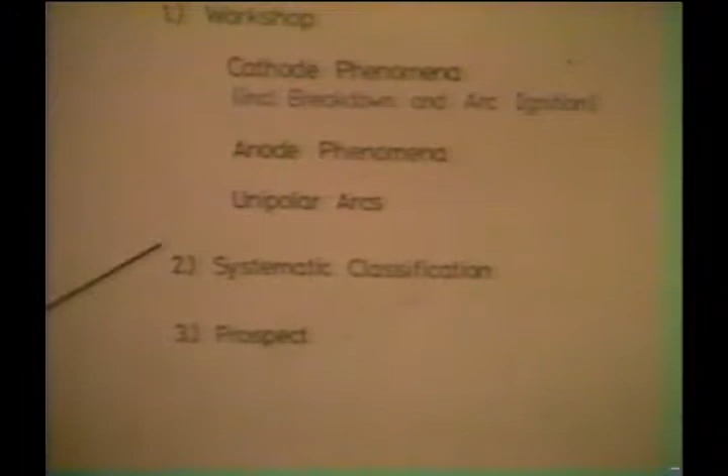I will subdivide my talk into three sections. First, I will consider the workshop and give some statements about what has been discussed—cathode phenomena, including breakdown and arc ignition, and anode phenomena, including unipolar arcs. Then I will make some more personal statements on what I think could be a classification at the cathode. And finally, if time permits, I will look into the future and discuss what I feel would be an interesting topic for future investigations.

So, let us start with the workshop.

The idea of the workshop occurred on a flight from Boston to Europe, to Dr. Delcroix and myself. We felt that people working on electrode phenomena, whether in gases or in vacuum, deserved some kind of meeting where they could exchange views. We felt that people in industry and those in scientific institutions or universities had insufficient contact, and particularly those working on fusion seemed to take little notice of what was going on in other areas, so work was being duplicated. We thought we should have some kind of conference first.

The first conference was in 1972 in Paris, then one in '74 in Bucharest, in '76 in Estoril, Portugal, and in '78 in Bad Honnef, Germany. In 1980 it was supposed to be in Moscow, but due to some unfortunate developments that didn't work out, so the fifth one, in '82, was in Berlin, as I said.

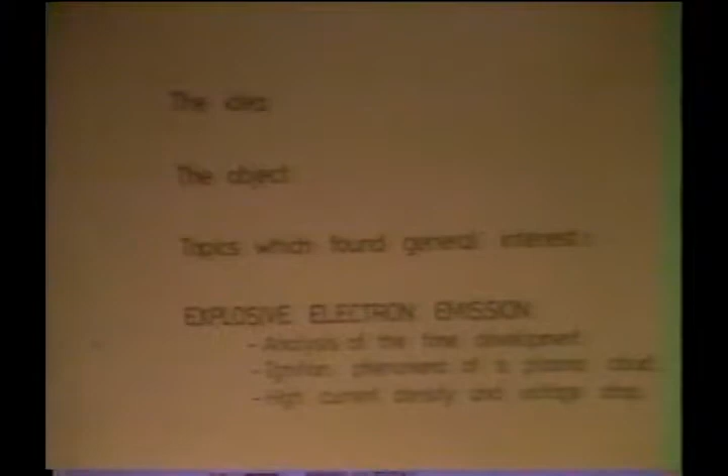This is a very old building, some kind of a castle there in Honnef, and you can't leave, you have no distractions, and you are sitting together all day, so you can't escape each other, and there were lots of discussions there. In Berlin, we also tried that. We had review lectures in the morning and short contributions in the afternoon, but shorter contributions than here, and more discussion, although some of the people, particularly some of the Russian friends, felt there should have been even more discussion.

We had chosen Berlin intentionally because we felt it would get more of our friends from the East to the conference, and we were very successful with that. Most of the well-known scientists from Russia were present, like, for instance, Mesyats, Lyubimov, Rakhovsky, Proskurovsky, Petrov, Sukova. I can't name them all here. This was very well attended from this side.

So we had 4 days of morning review lectures, so I'm going to review here the review lectures, which already shows that it will not be easy.

The object which I'm going to consider is shown on the next slide, please. That's not the object.

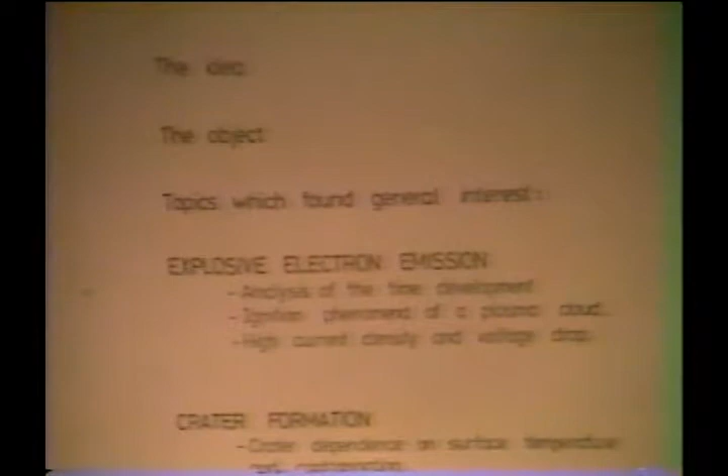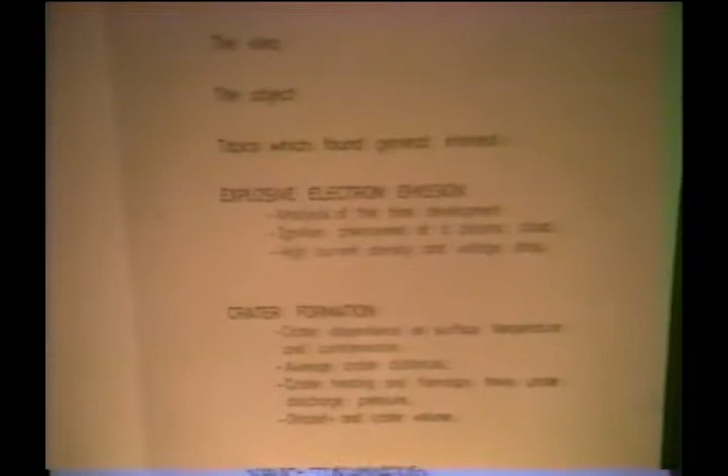I was careful, I went upstairs and got some others. If this doesn't work, I'm going to take something else here. Yeah, that's what I thought. Well, that causes a little bit of a difficulty. They don't work? I thought they were normal size, but they're probably not too tall, they're too fat, probably, if it is European size. Well, since I was afraid that would happen, I ran out a moment ago. Oh, there it is. Oh, very good. Very good, very good. Thank you very much.

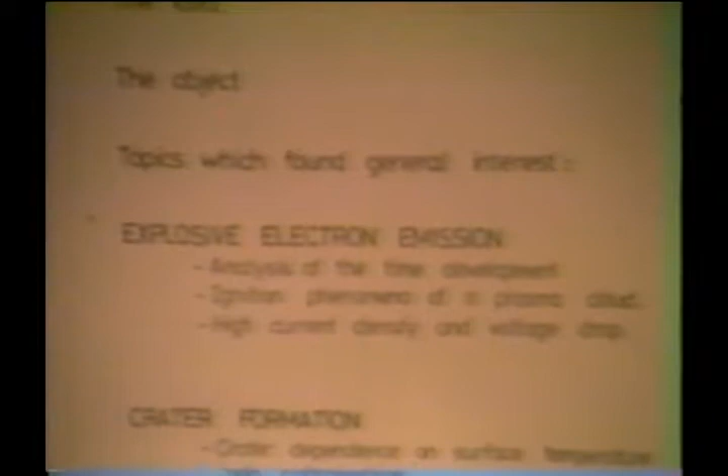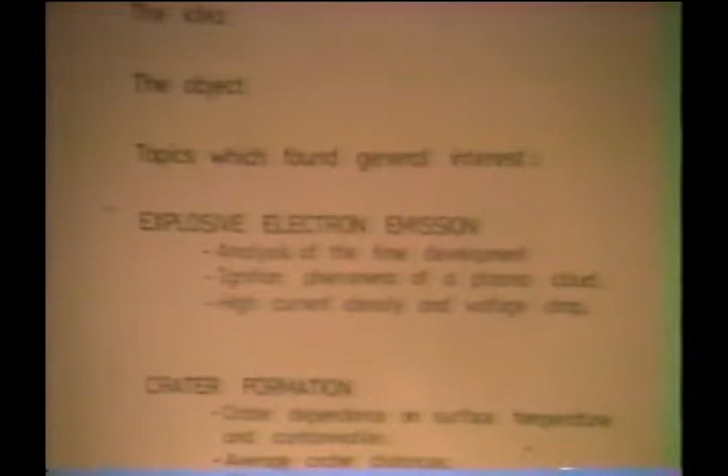Since you had this morning the lecture by the outstanding expert in the field, Dr. Mesyats, I don't have to go very much into the details. I remember that Mesyats presented an analysis of these phenomena on the basis of 3 laws: one giving the relation between the current density and the relaxation time for the flare, one giving the space charge limited current, and one the constant velocity for the expansion of the flare. With that he could explain some of the data of this really extreme phenomena. As you remember, we have nanosecond time developments, fields of 10 to the 7 volts per centimeter, densities of 10 to the 20 per centimeter cubed, and so on. So that is really a situation difficult to describe.

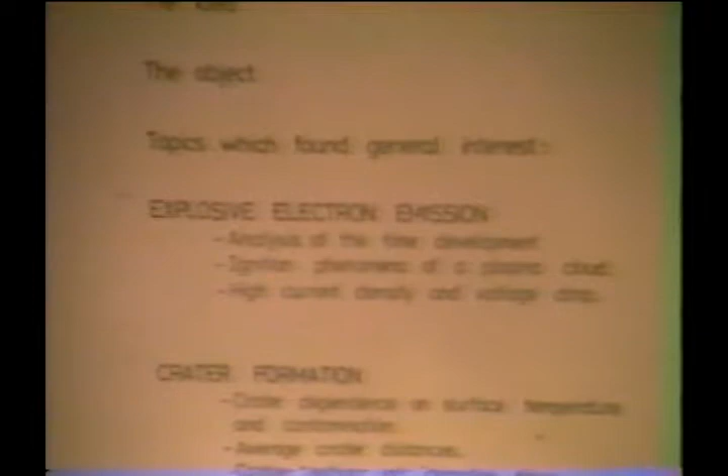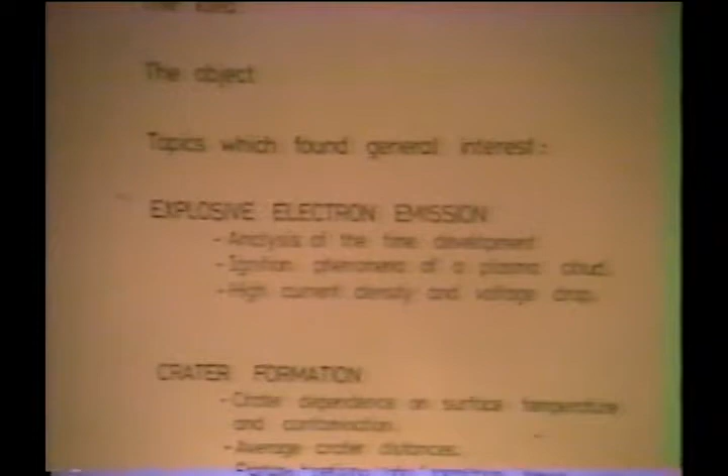Dr. Mesyats also talked about the motion of the cloud over the surface. You heard this morning, so I'm embarrassed to give a not so excellent presentation here. The motion of the cloud over the surface — one of the essential points I would like to stress is that he really could show that reignitions occur, and that they occur not uniformly over the surface. There are reignitions in the environment of the original spot, then there's an area where you have no craters, and then outside you have craters formed again. By the way, a phenomenon which also has been considered by Lyubimov and Rakhovsky. I will come back to this.

Apart from Dr. Mesyats, Dr. Fursey gave interesting information about the reformation of protrusions on the surface, and the current dependencies of subsequent pulses. It is impossible to give you details here about all these findings. There was one feature which particularly impressed me with respect to the last slide which you saw.

You all know that if you talk to a theoretician, you say, well, what kind of crazy surface are you using? Such a flat, straight, plane surface is nothing which happens in reality. And theoreticians like to say, yeah, but remember, it is molten, the surface. And a molten surface, of course, is smooth with no tips.

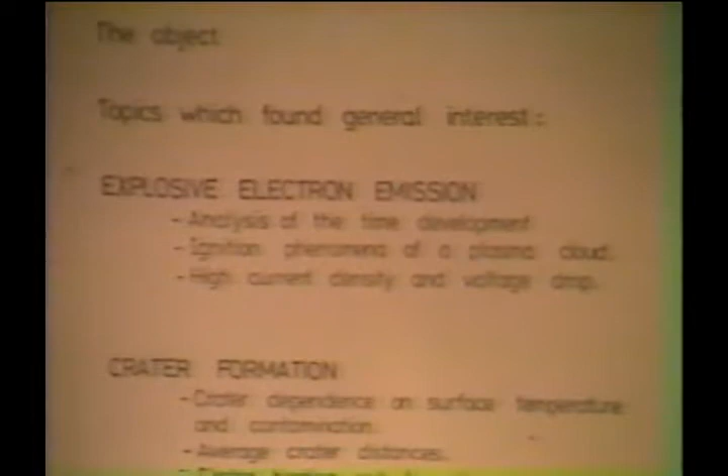So there was a lot of discussion about these things here, and the topic was very interesting. So I think I have to go a little bit faster. Another topic which had been discussed was crater formation. There was a paper by Jüttner who provided a large amount of information about craters. I will try to summarize that very briefly.

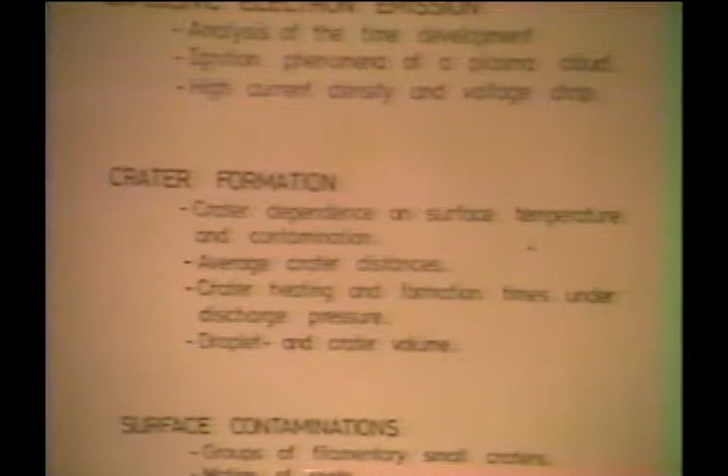And that the time development for the craters is very short. That was one of his important statements, about 10 to the minus 8 seconds. And that the crater formation depends on the temperature of the surface.

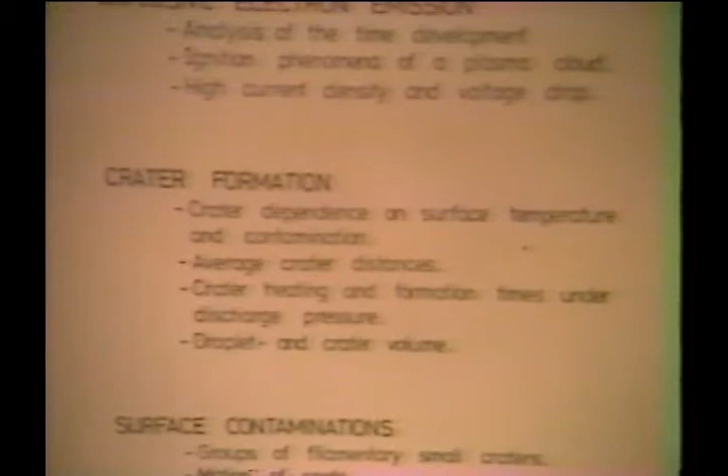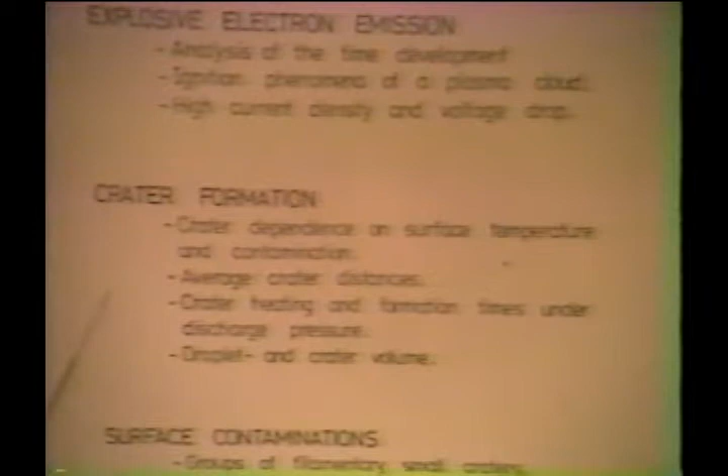One of the important conclusions was that Dr. Juttner said he felt that ion bombardment heating must be the decisive process in the formation of the crater because it is so fast.

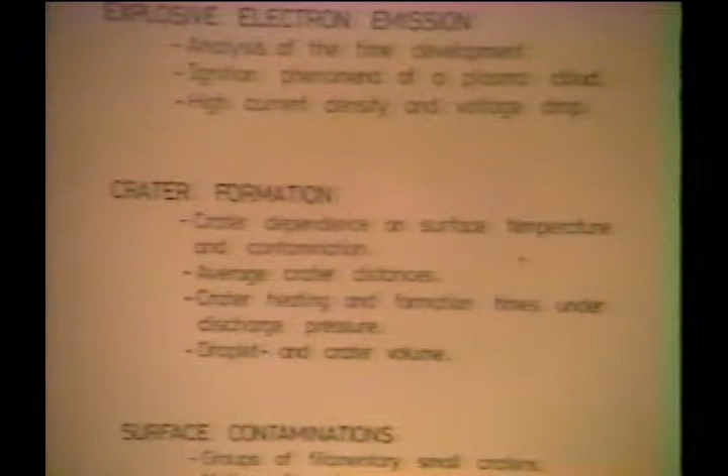There was another contribution by Dr. Daalder, who is also very much interested in craters. He showed from the observation of the random walk of the spots that they observe a Rayleigh law after some time, and from this Rayleigh law he could calculate the average step length and the development time. He came up with a step length of 3 crater diameters and development times of 10 to the minus 6 to 10 to the minus 10 seconds.

These contributions also were discussed quite a bit, and one of the points in the discussion was the question whether joule heating or ion bombardment heating is dominating.

One of the outstanding points was that Daalder said he had observed droplets from craters, the volume of the droplet being much larger than the crater. And yeah, that was a reaction of most of the people there.

Some people said, is mass conservation not true anymore? But we finally settled that this might be possible, because if you start to form the droplet from a mountain, from a protrusion, then of course the mountain is also material that may be larger than the crater itself, the crater volume.

I have to hurry. Surface contaminations — how much time do I have, Professor? Surface contaminations, there were contributions of Dr. Juttner. Halfway through, fine.

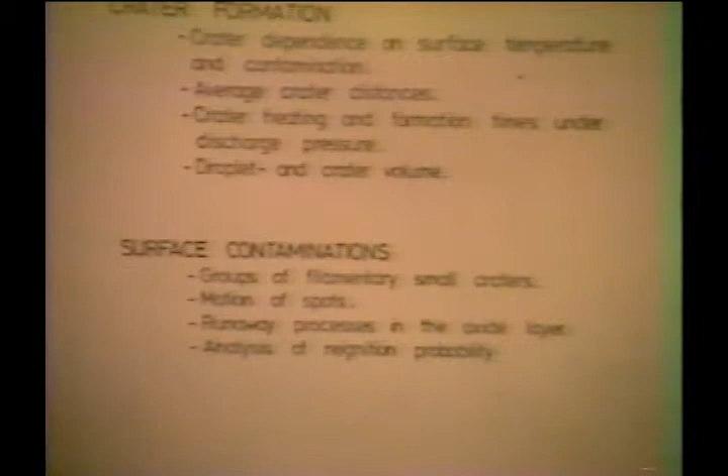There were many more contributions, but some of the most important ones, again by Juttner, by Dr. Geil, by Lyubimov, and Rakhovsky. The last one was a theoretical one. Juttner, as I already stated, found that he has a completely different structure on contaminations.

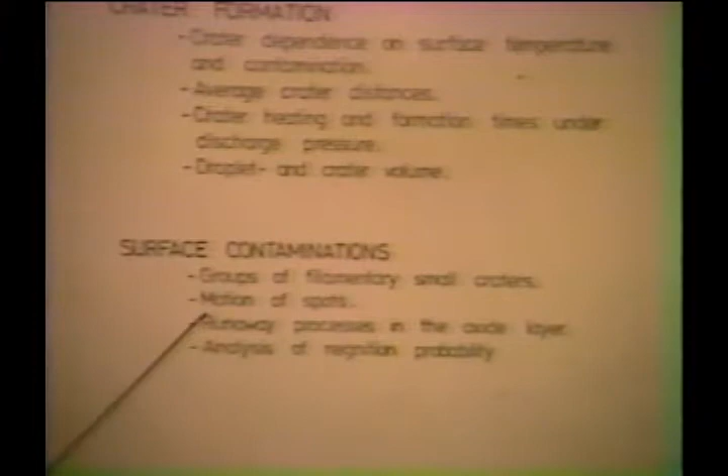According to Juttner, the spot is not moving anymore from rim to rim to rim, but now the motion is determined by the expansion of the cloud. The plasma cloud moving over the surface and then reigniting will determine the velocity with which this moves.

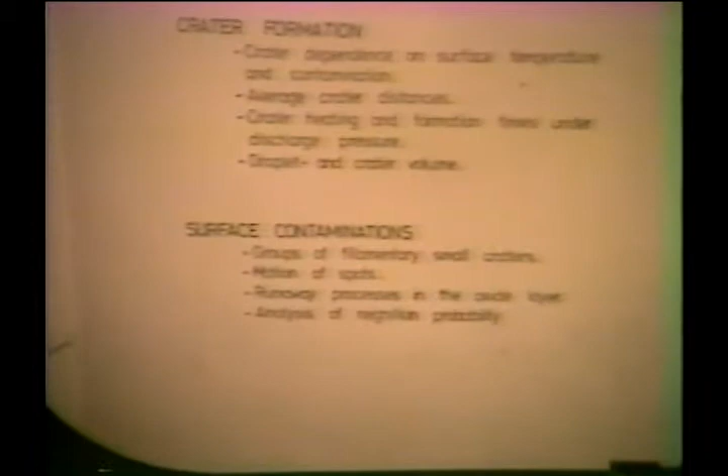Dr. Geil, there would be much more to say, but time is too short. Dr. Geil considered crater formations in arcs with high pressure, at atmospheric pressure in air, and found a difference between contamination layers of 2.5 nanometers and larger than 10 nanometers. He finds a remarkable difference in his observations depending on the size of these layers.

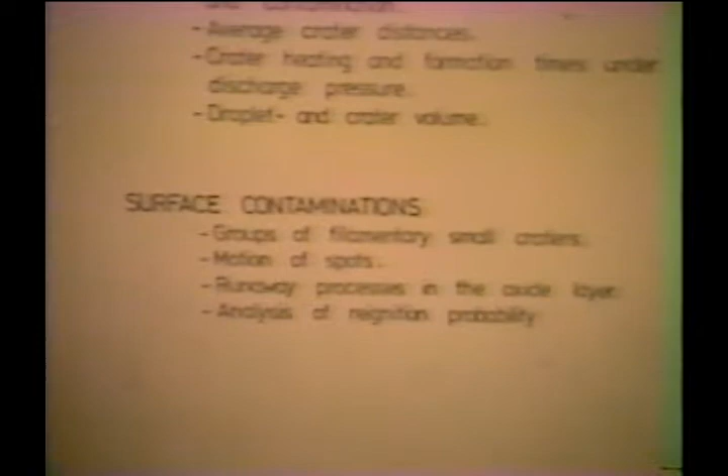He claims that for the thick layers, there are switching phenomena, filamentary channels developing in a thermal runaway process, because the conductivity of the oxide layer changes very much with temperature, so you get an instability and you get a filamentary discharge going down there. He also said that he can calculate the velocity of how they move.

The spots move across the surface. He gets 10 to the 4th centimeters per second.

He also claims that the heating below the contamination layer blows up the contamination layer and provides a part of the material lost from the surface.

This was also a phenomenon studied theoretically by... I will keep it in my hand now.

Studied theoretically by Lyubimov and Rakhovsky. They considered a very first approach to the plasma cloud over a spot, and they calculated the potential variation across a spot and the evaporation of contaminated material from the surface due to the expansion of the actual cathode spot, or cathode cell, whatever you want to call it.

And they find that the voltage at the rim of the plasma cloud is 100 to 120 times what the voltage is in the center. And therefore they claim reignition occurs at the rim and not close to the center.

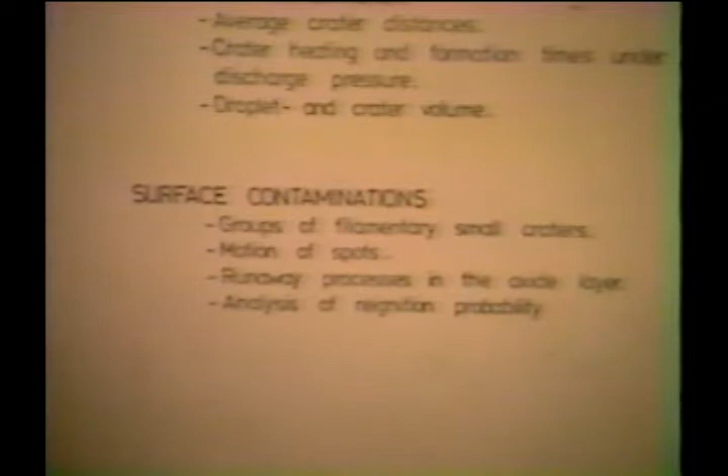This may be seen in connection with the experimental observations of Messier. And also their calculation of the mass loss from the surface, they claim, shows that a substantial part of the mass loss is due to the evaporation of these contamination components on the surface of the electrode.

The discussion about the contaminations was not as focused as in the other points, so I'm not going to elaborate in detail on this.

Now I need one more hand. Thank you. Okay.

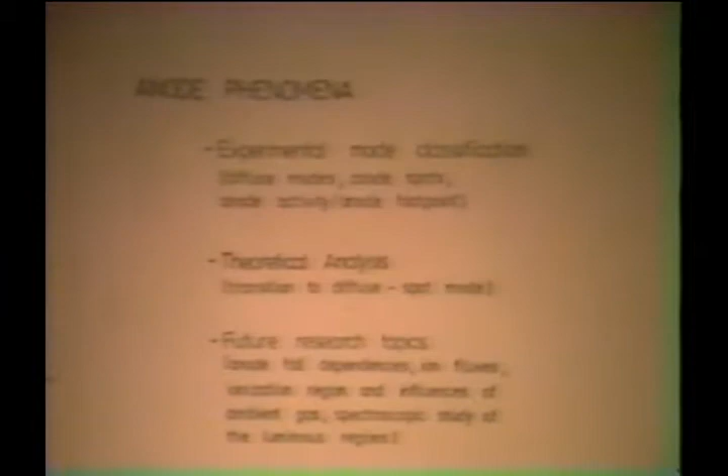Anode phenomena. The anode phenomena also took one day of discussion and presentation. Many features have been reported. The review lecture was by Dr. Kimblin.

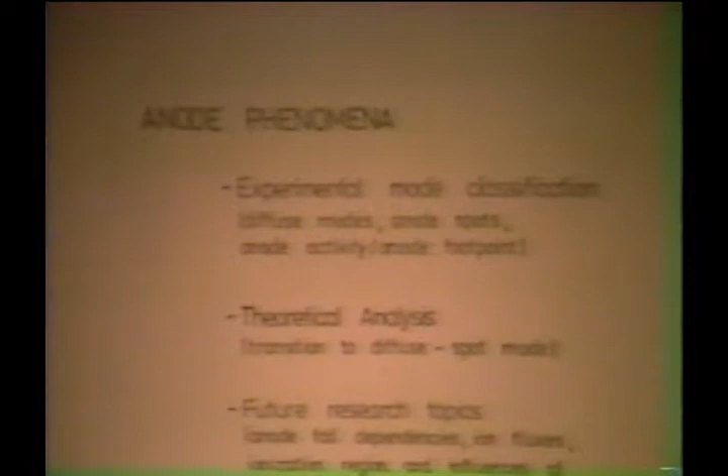Well organized and very instructive. An additional lecture by Dr. Miller was very useful. And the outstanding feature was some kind of classification of the phenomena which have been observed at the anode surface.

Dr. Kimblin distinguished diffuse modes at the surface, anode spots, anode activity, and anode foot point. In simple words, anode diffuse mode is a discharge going completely diffused to the anode surface. Anode spot is a highly constricted mode with strong evaporation from the anode.

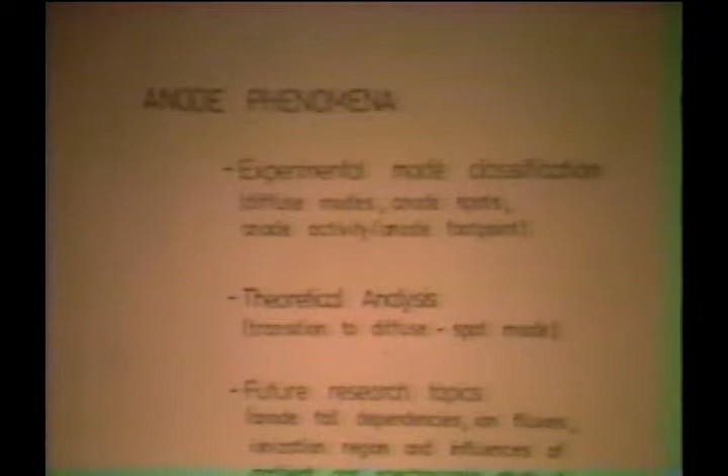Dr. Miller, on the other hand, distinguished diffuse modes, anode spots—that makes you happy because it's the same thing—but he also has so-called foot points, patterns, and sputtered modes. Sputtered modes are where the anode contributes due to sputtering. I hope I'm quoting you halfway correctly. Foot points are where there is such a concentrated form, and patterns are where you have several.

I have two slides which you can quickly show, please. This one you forget, no time for that.

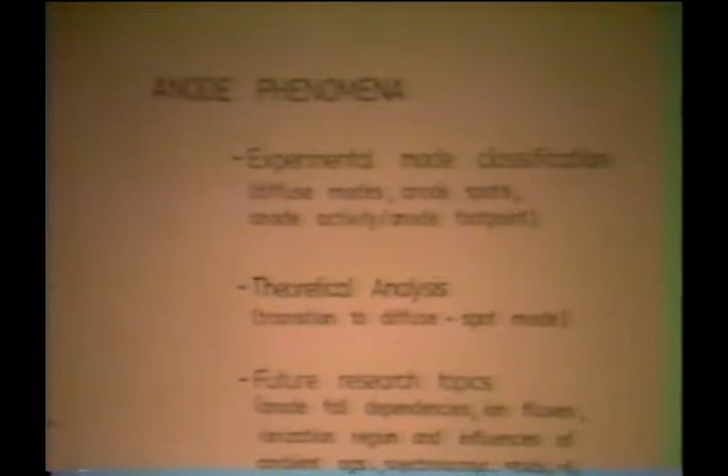Which is to me not very surprising, because whenever you have a transition from one mode to another mode—I don't know whether that is your interpretation, it's mine—then you can expect non-stationary phenomena at the surface. So I'm not surprised to have this anode activity in this region. I think that is very valuable information, one of the many he had to give.

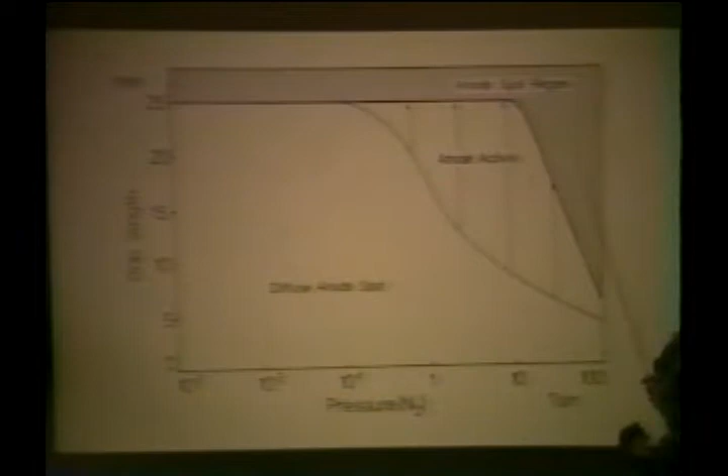And Miller showed some diagram, which is on the next slide please, on which you will probably not recognize, Dr. Miller. I put two of your slides together to save time, and now you certainly won't recognize it now. It should be turned around, thank you.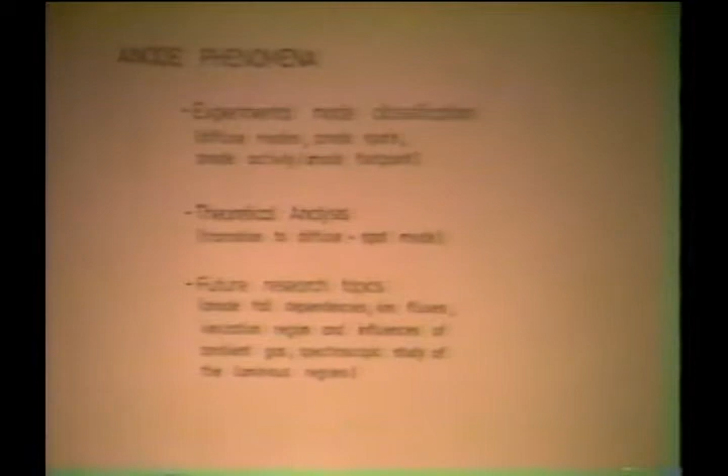In the discussion, I remember the question was raised whether the foot points of Dr. Miller and the concentrated mode of Dr. Kimblin were the same. I may misinterpret them, but I had not the feeling that they said yes, at least not very enthusiastically.

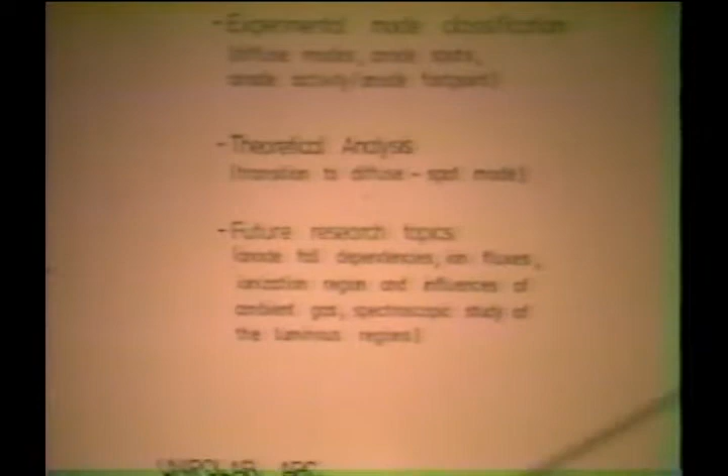Kimblin also gave some future research topics which he liked to be considered. He also stated under what conditions, what favors diffuse, what favors spot, what favors activity. He also gave some statement about future research.

The anode fall should be measured in the diffuse mode. The ion fluxes, the ion energy should be measured in the anode spot region. The ionization region should be localized. The influence of the ambient gas. And he advocated spectroscopic data of the luminous regions.

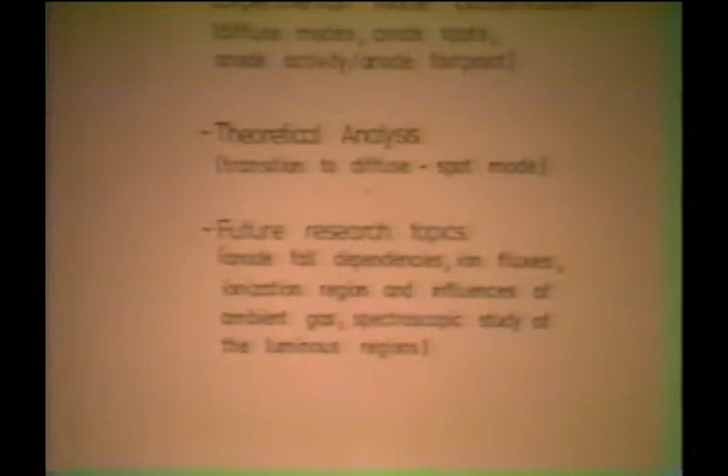It just occurs to me that I forgot to mention there were many other contributions about cathode phenomena, which you will partly hear here. Of course, there were measurements about erosion losses in magnetic fields, and as a consequence, the famous retrograde motion, which you all know.

I was just in Canada and visited - there's a new theory there by Dr. Drewy about retrograde motion. There is a theory already well known by Dr. Schrader, who will talk today, I think, after this lecture about retrograde motion. Dr. Harris will talk about retrograde motion, so you are not going to miss this. I therefore do not have to give it here.

As far as anode phenomena are concerned, there were additional features. One lecture I remember was by Schuacher, trying to consider the magnetic constriction before the onset of the anode spot instability. And Schelleken had experimental findings.

In the discussion, there was hot discussion because Schelleken claimed he had electron temperature lower than the ion temperature and collision dominated. And that seemed to some people rather strange. I don't know what happened to this point. No final result was achieved there. So that was anode spot.

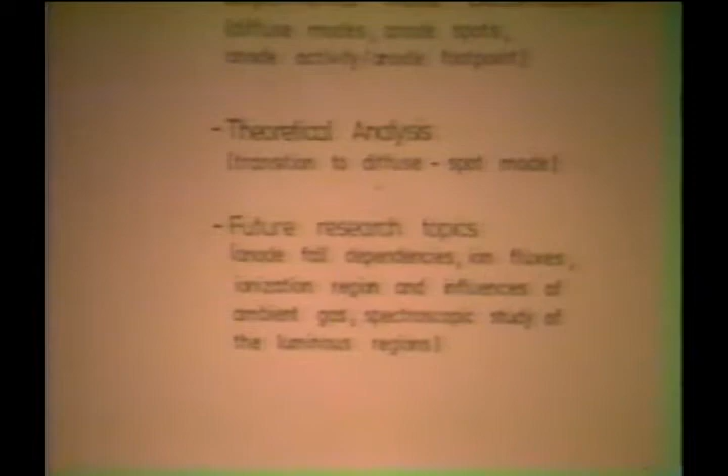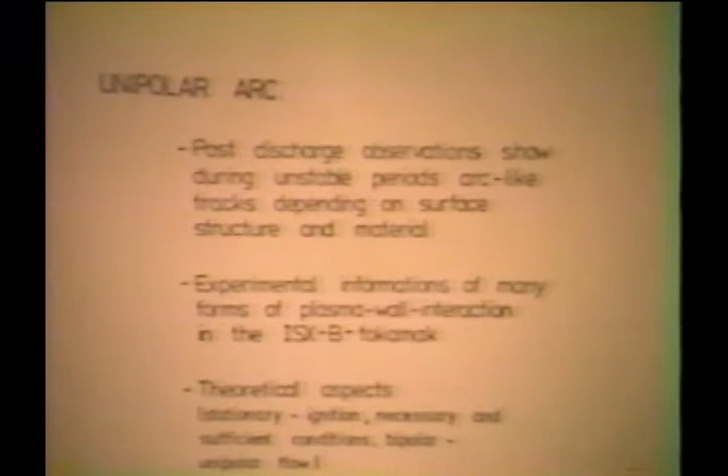I'm turning now to the unipolar arc. There was a review lecture, a very good review lecture by Dr. Wolf, who summarized all the data which were available, and I could say that the essence of his statement was...

In post-discharge observations, nearly all fusion devices show traces of arc spots on the surface of the limiter or other walls, which resemble very much the arc spots you observe in our equipment. It is not sure that each experiment has such an arc spot, but they are there.

They are particularly there during the build-up and the ramp-down periods, and they are also there when you have instabilities in your discharges. I may add an experience which I had in Köln. When I visited Köln, my feeling is I'm not at all sure whether these are unipolar arcs observed in these fusion devices, or all of them. The reason is that it is a terrible mess if you look into what happens there.

There was this highly interesting lecture by Dr. Clausing from Oak Ridge, who showed a film with 3,000 pictures per second about what happens at the limiter. If you have seen the film, you give up explaining, because everything is happening there. Pieces of the wall are moving away, there are explosions, instabilities occur, and anything can happen there.

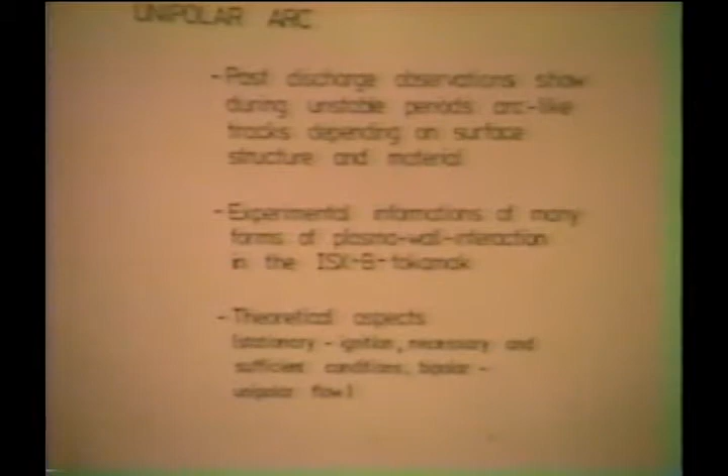There was also a discussion about the original Thompson criterion - Robson and Thonemann criterion - and the opinion was that it is neither sufficient nor necessary. It is not sufficient because it considers only one aspect, and it is not necessary because you do not have to have the internal EMF in the sheath. You can have it in the plasma. No time to go into the details with that.

If you have points there, you can ask me in the discussion.

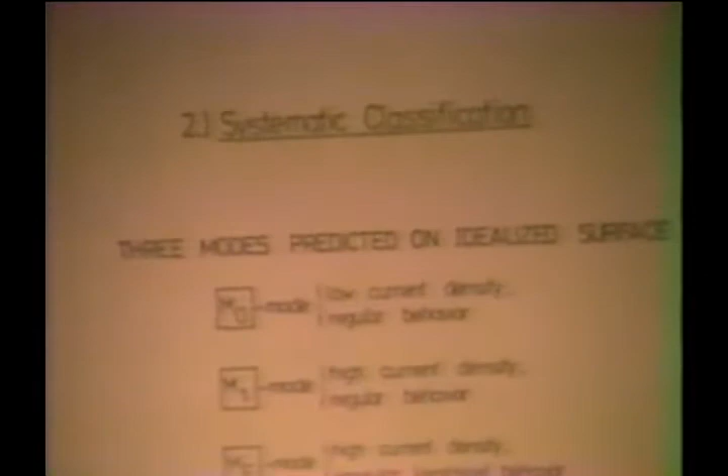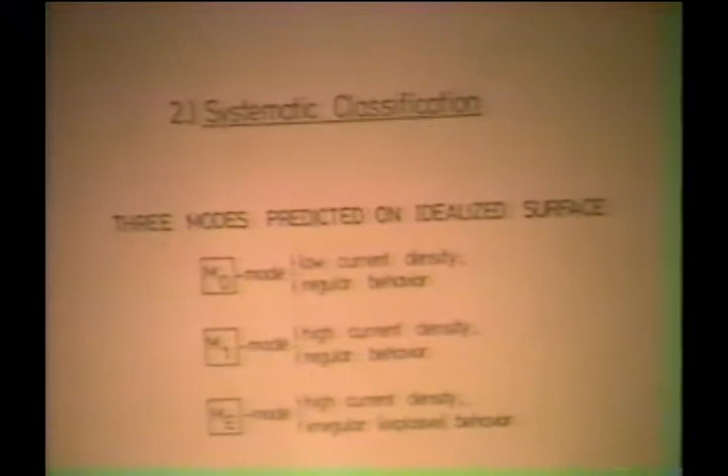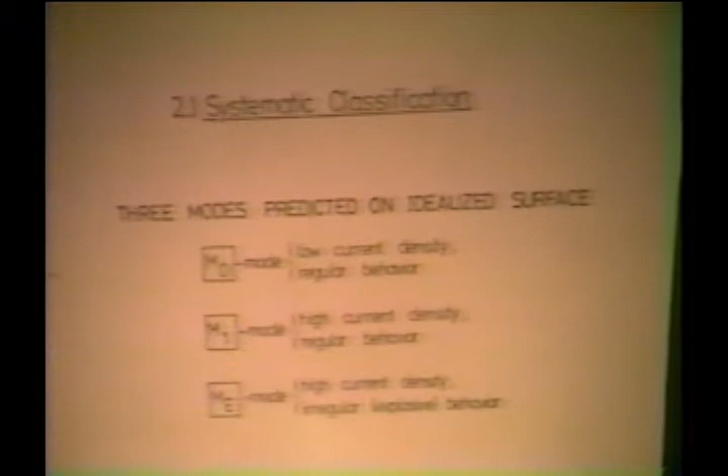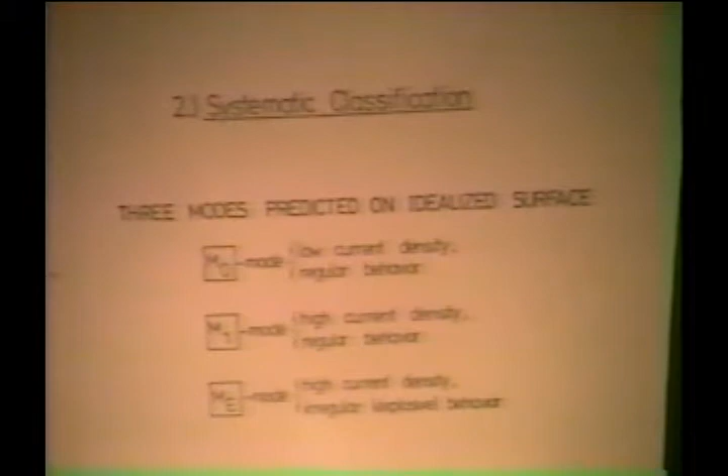Okay, so far the report. What about a summary? I'm not going to give a summary about the unipolar arc, because this is in such an elementary and early state that one cannot give a summary. I'm also not going to summarize the anode phenomena, because I think they were well summarized by Kimblin, so that's not necessary. What I'm trying to do is make a statement about the situation at the cathode surface. My claim is that on a clean cathode surface, one can understand the phenomena qualitatively by three modes: the M0 mode, the M1 mode, and the ME mode.

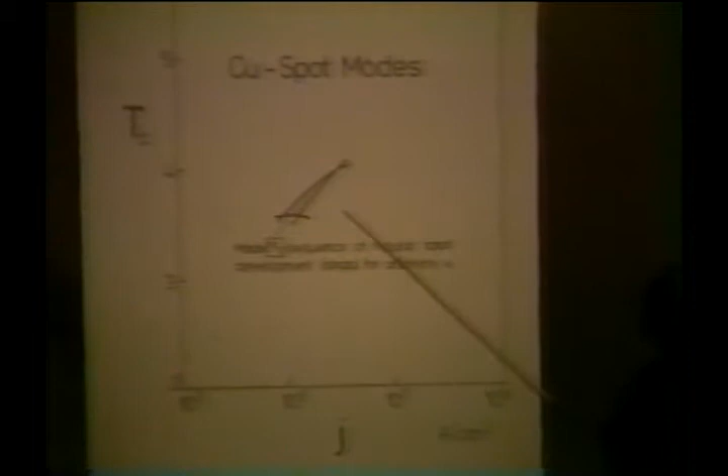If you show the next slide, I will show where these modes are situated. If I plot the current density at the spot down here, and the temperature of the surface up here, there is one mode with a moderate current density of 10 to the 5 amps per centimeter squared at a copper cathode, with the temperature just above the boiling point. This is a sequence of regular spot development steps, as Juttner claims—you see it in his observations, without any explosive phenomena. This mode exists for most metals except tungsten and molybdenum. This is a theoretical result, by the way, not an experimental one.

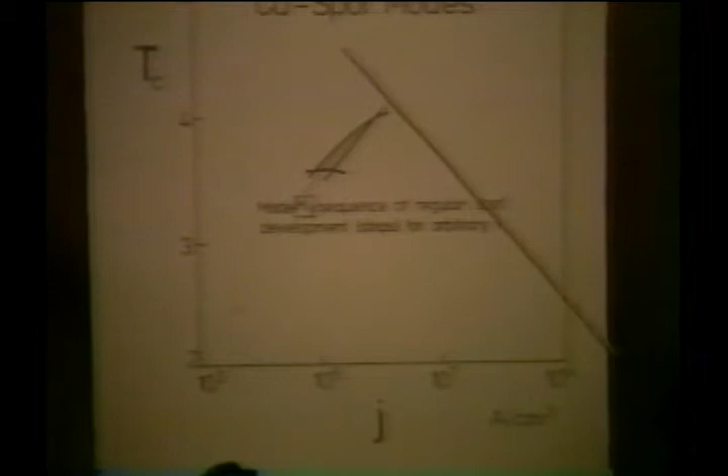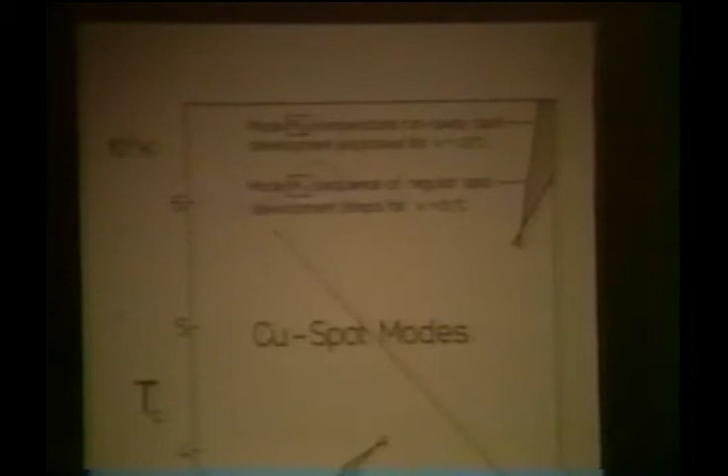There's another mode with a very high current density, according to the theory, up to 10 to the 8 or 10 to the 9 amps per centimeter squared, which also has a sequence of regular spot development steps—if the velocity is larger than sigma divided by tau, where sigma is the diameter of the spot and tau is the time of spot development, either the thermal runaway time or the stationary time. What does that mean? If the velocity is faster than this, the spot has no time to fully develop, so you cut off the runaway and the development of the spot. Then it does regular steps, as observed for instance by Juttner, with regular behavior.

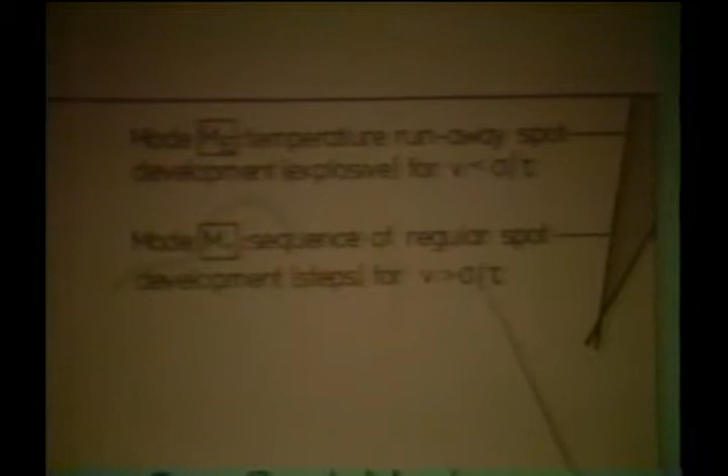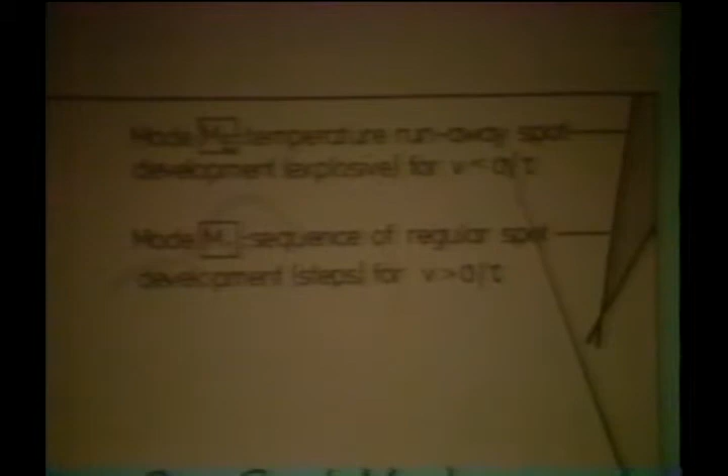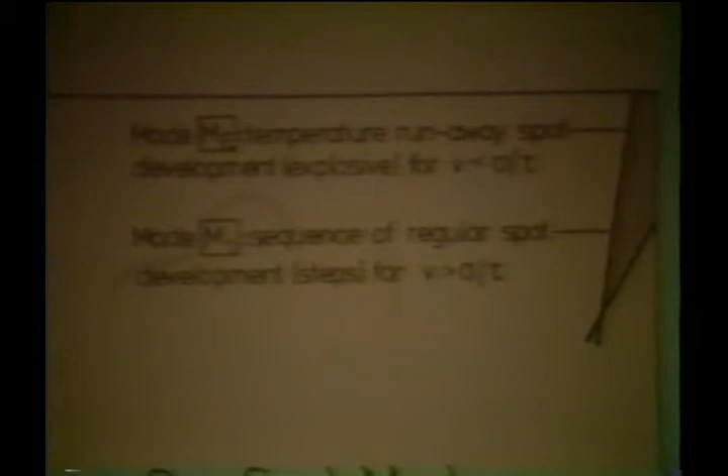The third mode is the spot at the same area, but now calculated for a velocity smaller than sigma over tau. In this case, the instability—the thermal runaway—fully develops, and it is no longer a regular phenomenon but rather an explosive one, where the liquid is thrown out and the vapor is transformed into a plasma on an extremely short time scale, maybe not even passing fully through the liquid state.

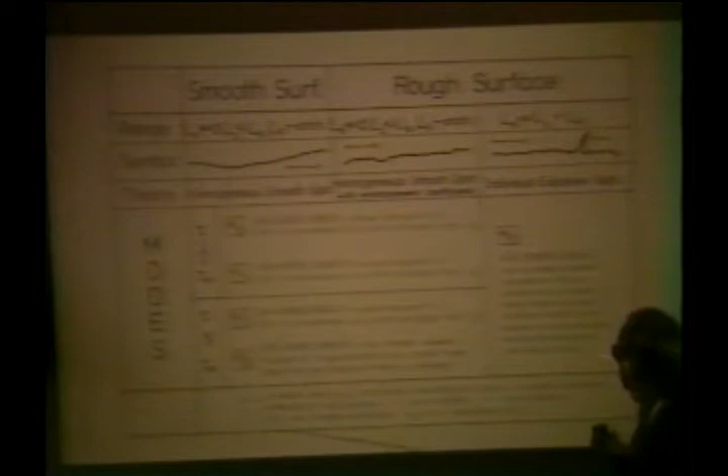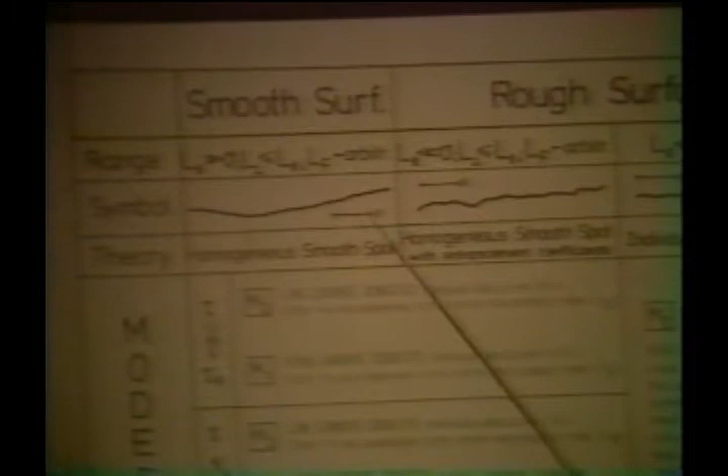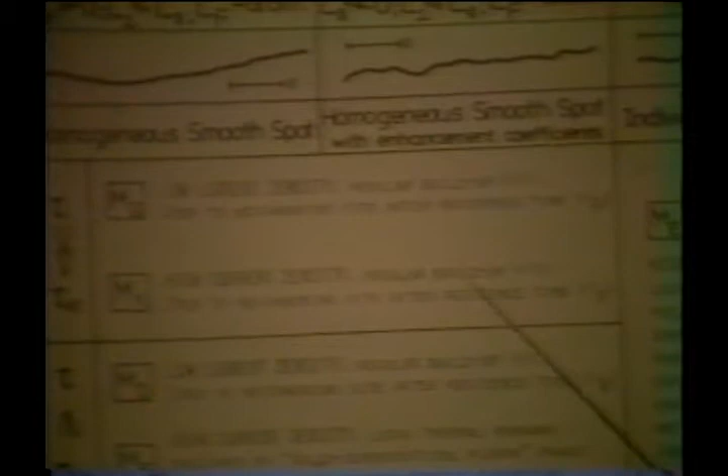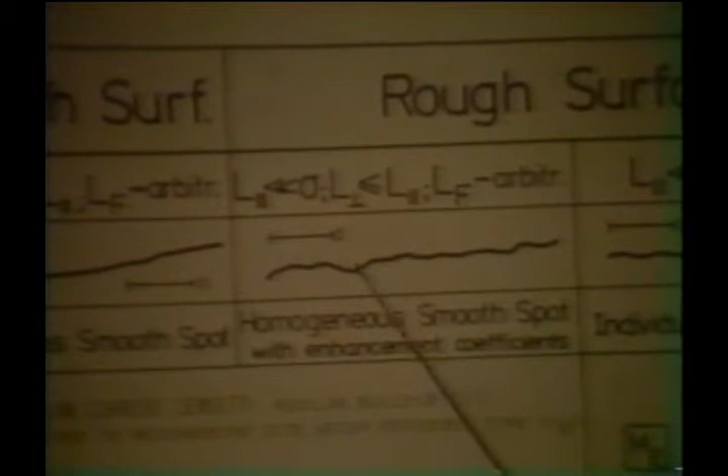The same is true for the homogeneous smooth spot with enhancement coefficients. If the irregularities are not as pronounced as in the picture from Little and Whitney, you can account for this surface variation using enhancement coefficients in the theory, and both features can be treated simultaneously. There will be a shift in the current density or temperature, but no qualitative difference.

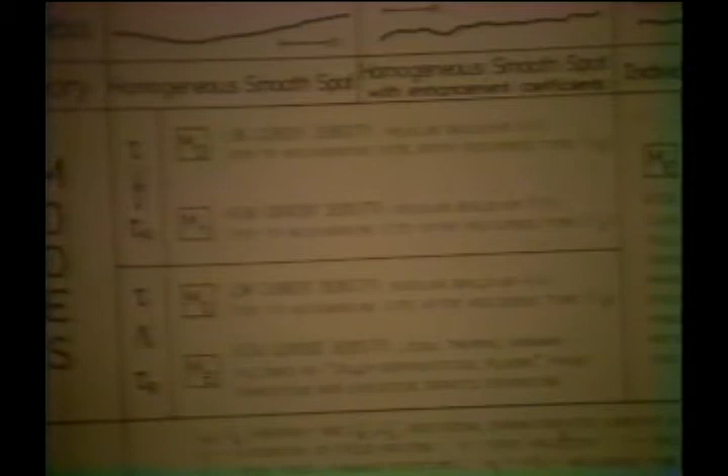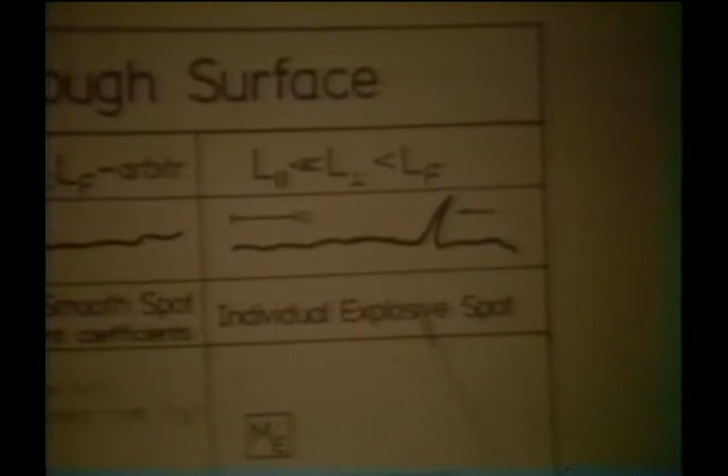You have these modes if tau is larger than tau r. If tau is smaller than tau r, you still have the low current density mode, but you also get this explosive mode in addition—and what I want to stress is that you can have an explosive mode without a micro protrusion, according to the theory. You don't need one; you can have a completely flat surface and still get explosive behavior. If you have a situation with a micro protrusion, or many micro protrusions, you would also have the ME mode. Of course, this ME mode and that ME mode, although in principle identical, may give different quantitative values for current density and temperature when evaluated numerically, but the basic background is the same.

So, I repeat, for the cathode surface, I believe we will have only three modes to explain the phenomena which we observe. Thank you for that slide.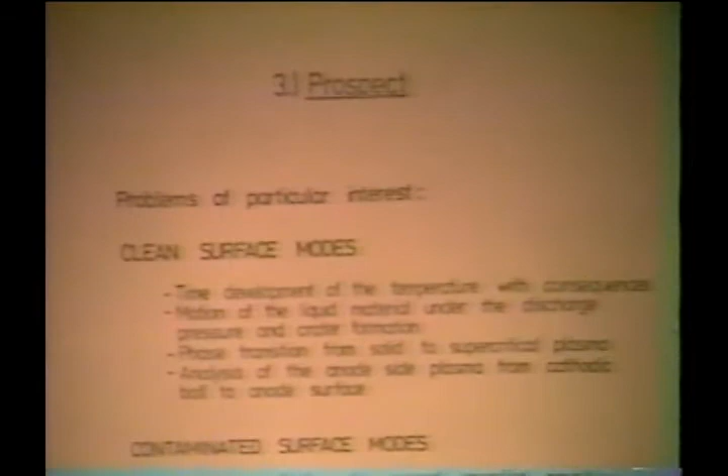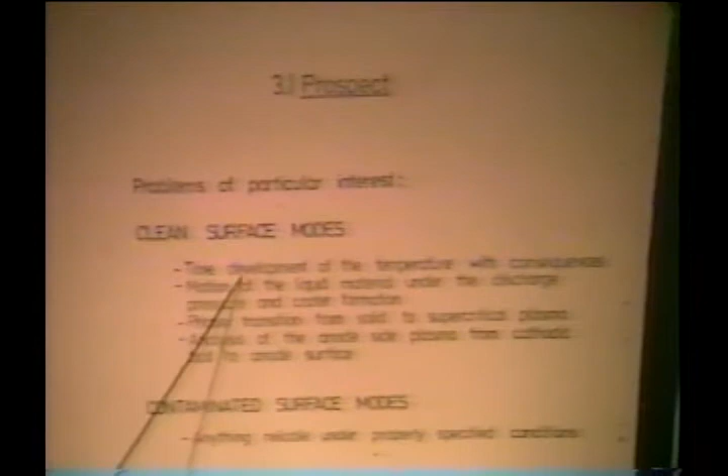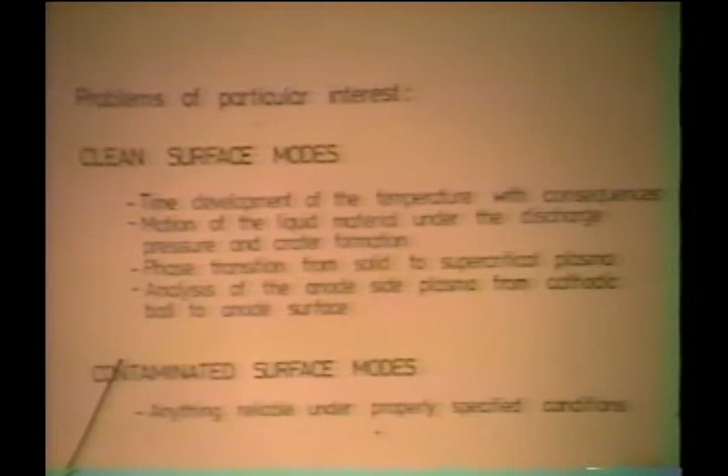Since the red light is on, I come to the prospect. What would I like to see done in the future about the cathode phenomena? I refer again to the statements of Kimblin regarding anode phenomena. On clean surface modes, I would like to understand the time development of the temperature and its consequences. There is no calculation and no real understanding of the temperature development behind the surface, particularly in the case of thermal runaway. What happens there is not understood, and will not be for some time, because it's such a complicated phenomenon.

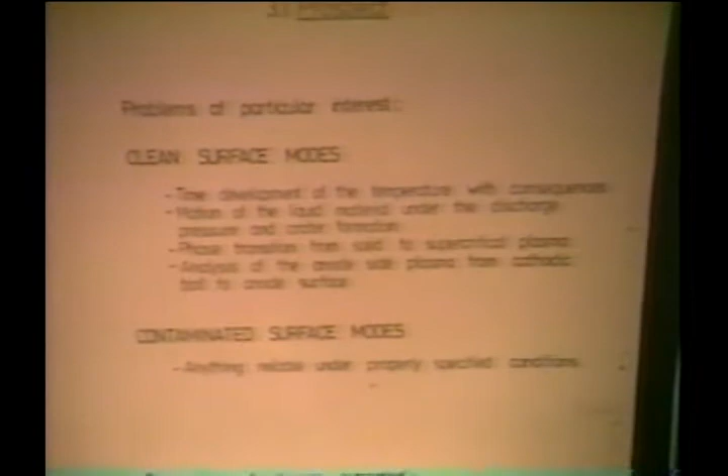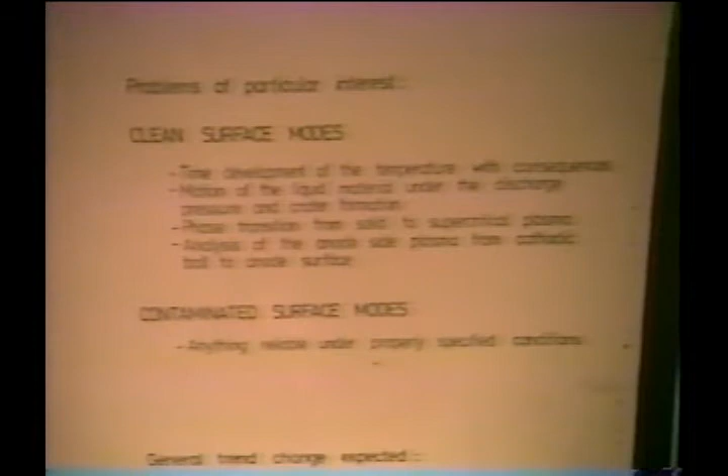Then there's the motion of the liquid material under the discharge pressure and crater formation. This has not been done. It has been calculated what happens assuming the liquid stays in place, but actually the ion bombardment, as many authors have stated, pushes the liquid out of the surface and forms a crater. That has not been taken into account in the theory I showed here, and it should be. The phase transition from the solid to the supercritical plasma, which is so decisive for the explosive phenomena, I would like to see better understood.

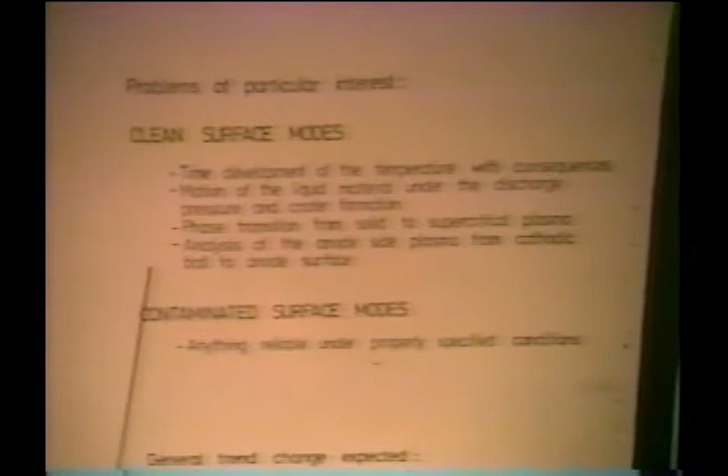And most important, the analysis of the anode side plasma from the cathodic ball to the anode surface. I believe Dr. Boxman is going to talk about this today. Dr. Harris has already done some calculations about this, but there is a lot to be done to understand this part of the plasma, and I believe we need better insight here before we can understand mass loss and other things.

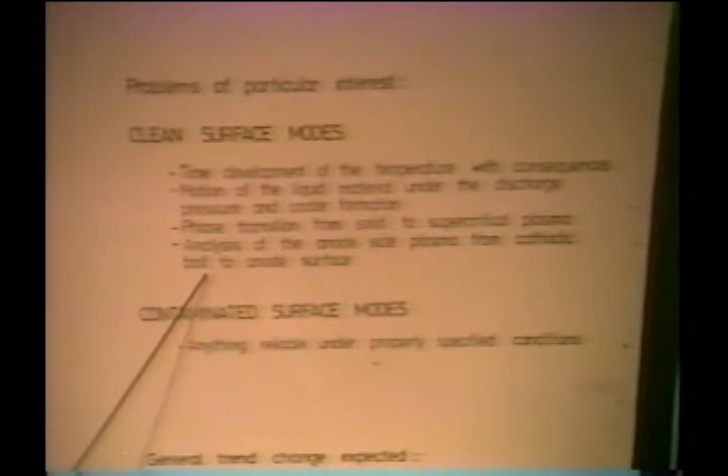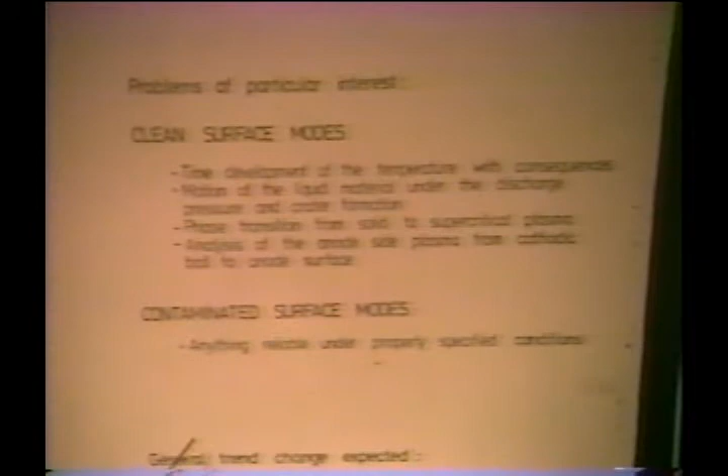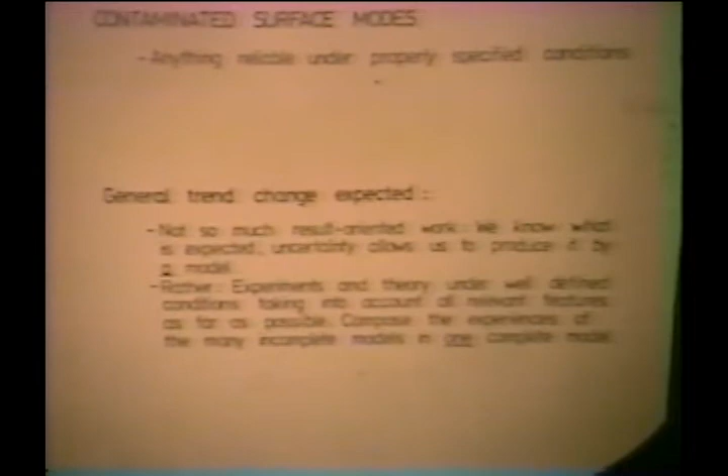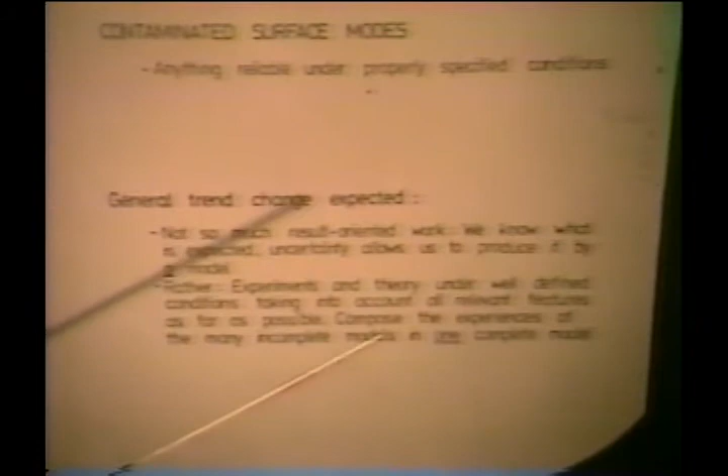For contaminated surface modes, my impression is that anything reliable under properly specified conditions would be very valuable. The general trend I expect is less result-oriented work, since we know what is expected and uncertainty allows us to reproduce it with a model. What I hope is that the models and understanding treated so far can be put together into one model, combining our understanding of one aspect and another, experimentally and theoretically. My hope for the future is that we can put that into one complete model able to describe one typical subject. We will never have a model describing all contaminated surfaces with inclusions and clean surfaces at the same time, but rather a model which completely describes one experimental setup.

If I think back to when Weizel, Rompe, and Schön had their first looks at the cathodes of arcs, and found the spotless arc, the arc with a spot, and with multiple spots, and if I think of the one-dimensional theoretical approaches at that time, I do not want you to get the impression from my lecture that nothing has been achieved. I hope you got the impression that a lot has been achieved. At least I believe there has been tremendous progress, and that we are very close to a preliminary understanding of the phenomena occurring at cathodes.

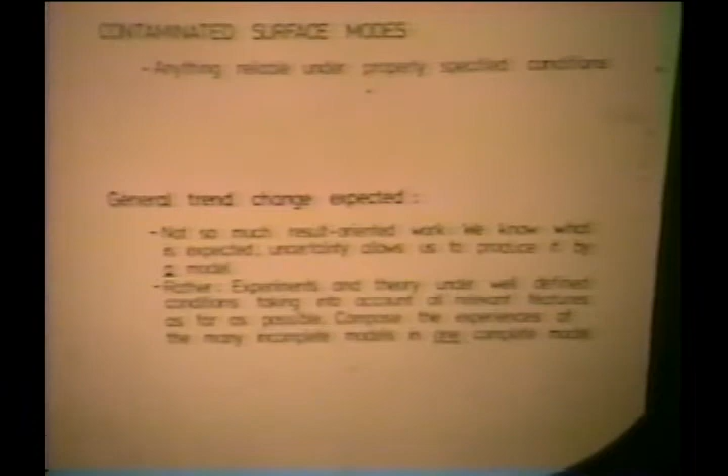I hope that all of you stay interested in this subject and topic, which I believe is very fascinating because of the extreme conditions which one finds there. Thank you very much for your patience.